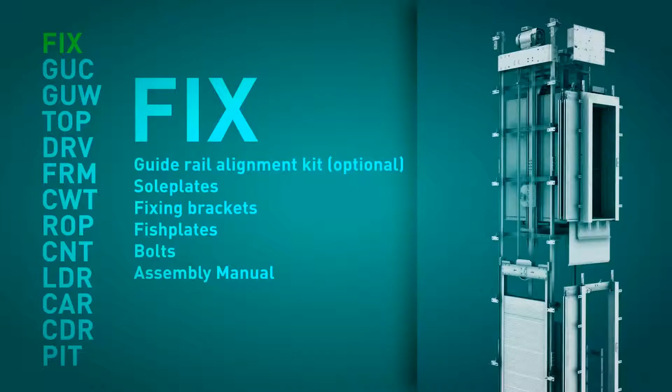Wittur considers the installation of an elevator as a sequential assembling process of elevator subcomponents. It is for this reason that the parts of Wittur's elevators are carefully sorted and supplied in modules. By module, we mean the group of components which, once assembled, carry out a specific function within the complete elevator.

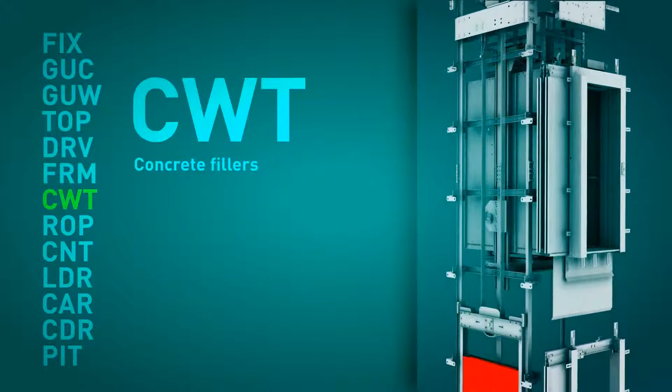Each module can be made up of one or more packages. These packages are identified with a description of the module and its position within the assembly sequence. The supply of the elevator has been designed to fit what we consider to be the logical assembly sequence of a machine roomless elevator.

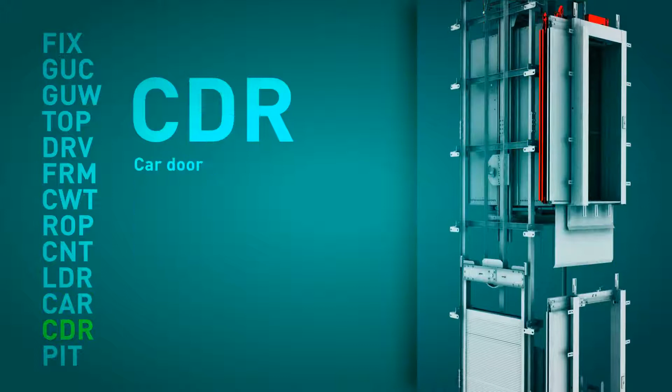The package that we have to open first is labelled and easily identifiable. Attached to this package, in a protective plastic cover, is the packing list and a document which details and lists the material supplied in each of the various modules. In this first package, we can find the assembly manual of the elevator and all the assembly handbooks of the individual components. Before starting the assembly process, we strongly recommend the assembly technicians read all the manuals in detail.

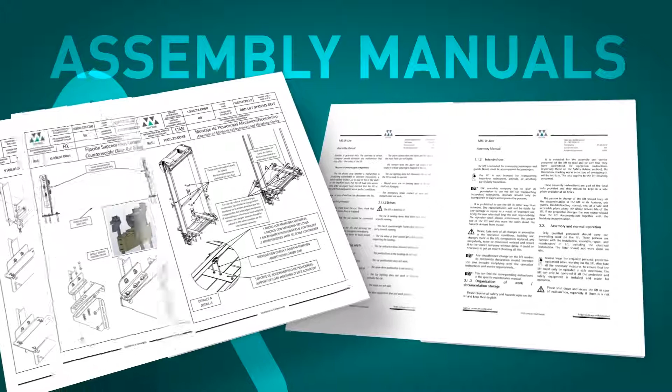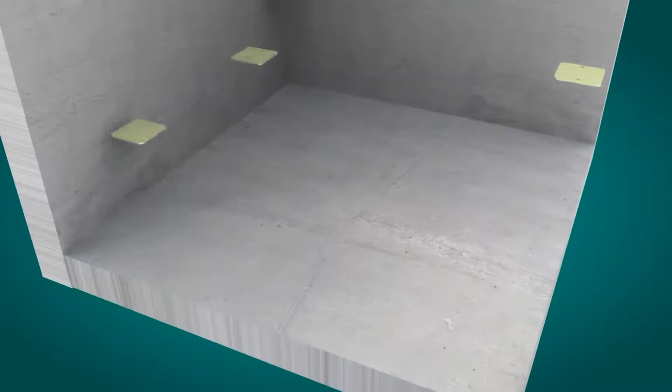The assembly of the MRL W line starts by checking that the conditions of the shaft, dimensions, cleanliness are satisfactory and that all the necessary material and auxiliary tools are available on site. The guide rail sole plate must be correctly positioned and levelled according to the assembly manual.

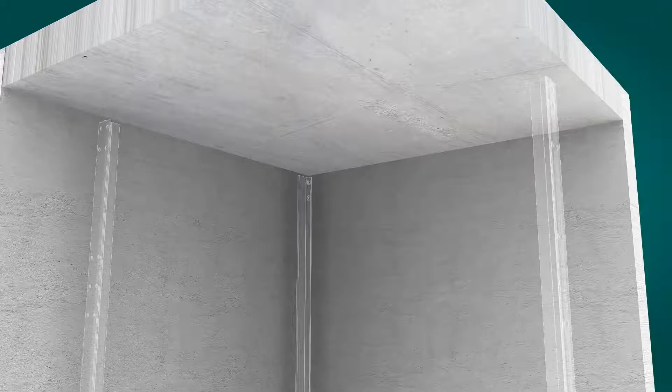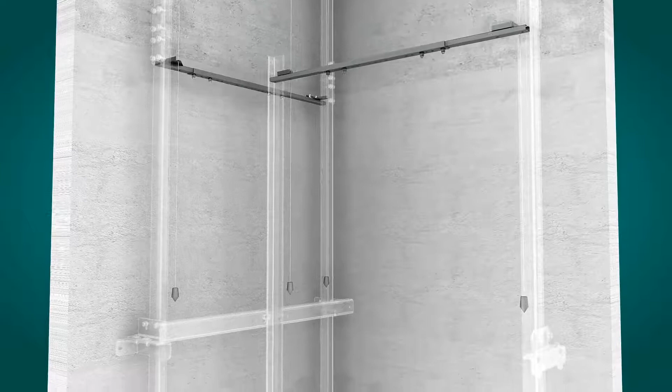The bottom portions of the car and counterweight guide rails are cut and assembled according to the installation drawings. Should there be a difference between the pit depth given in the installation drawings and the as-built depth, the bottom guide rail can be adjusted and cut to the right length. A tool to help align the guide rails is recommended in order to guarantee a correct assembly. Wittur can supply a guide rail alignment kit upon request.

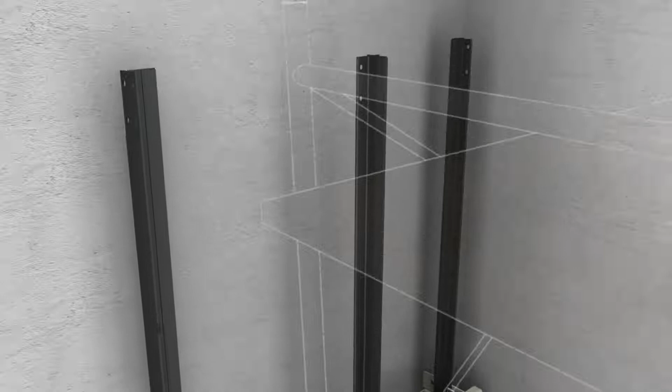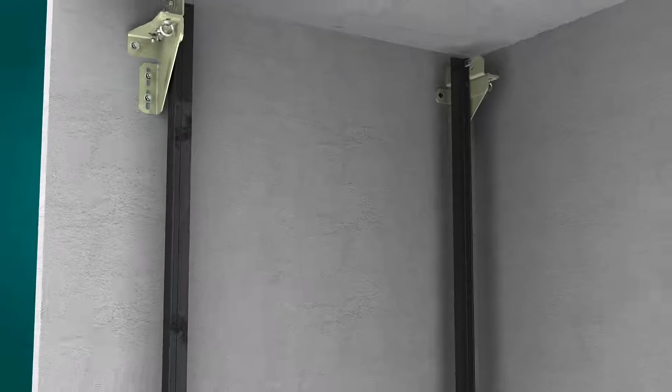The first row of guide rail supports is assembled. Their position is detailed in the installation manual. With the help of some scaffold platforms, the successive guide rail portions, 2.5 meters or 5 meters, are assembled with their corresponding support brackets. Once the last section of the counterweight guide rail has been assembled, the topmost bracket can be fixed into place. The last portion of the car guide rail fixed to the bed plate is assembled once the machine support has been installed.

Alternatively, the process of assembling the guide rails can be carried out from a temporary platform which is fixed to the guide rails that have already been mounted and lifted up through the shaft by means of a block and tackle.

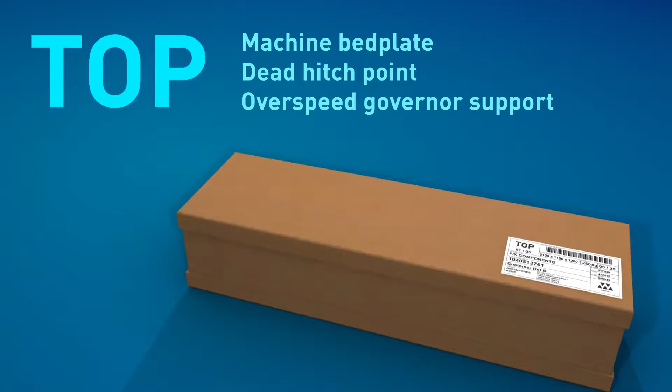The machine bed plate is assembled next. A comfort kit is standard supply for 1.6 meters per second, but optional, though highly recommended, for 1 meter per second. These low-frequency metallic cushions absorb any vibrations that the system may produce.

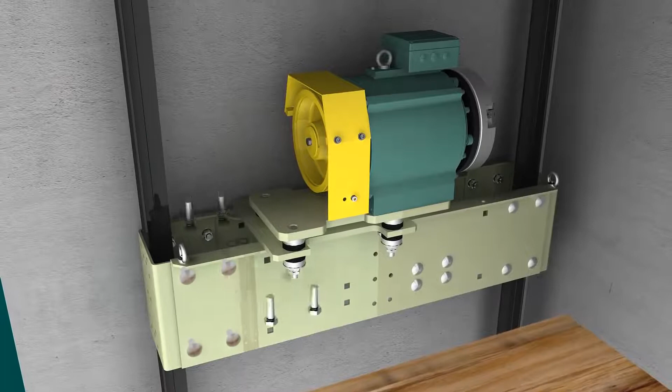The machine is fixed to its support and is lifted and guided into position with the help of a block and tackle. It is fixed to the sheave side with the fixings provided, and once the machine is level, these fixings and the clamp can be tightened. Once the machine is in place, the penultimate guide rail support and the last section of car guide rail fixed to the bed plate can be assembled.

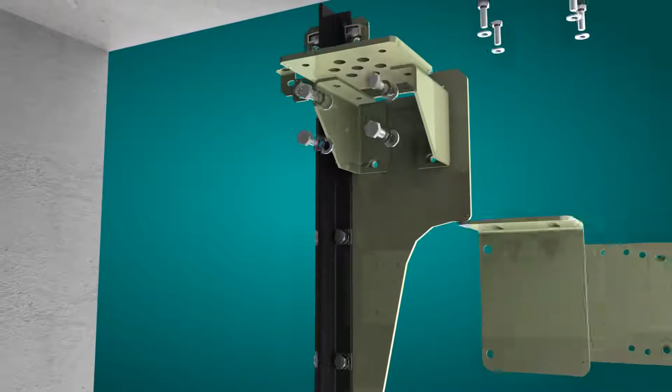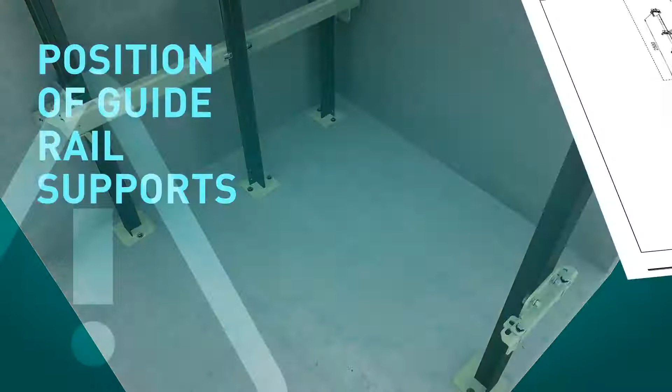The dead hitch point can now be assembled, followed by the overspeed governor and the slack cable control device, should it be applicable. At this point, all the mechanical elements of the elevator are assembled in the headroom. All the guide rail supports must be placed in the positions detailed in the installation drawings. The position of the top and bottom brackets is of special importance. Any scaffolding and platforms should be removed at this point.

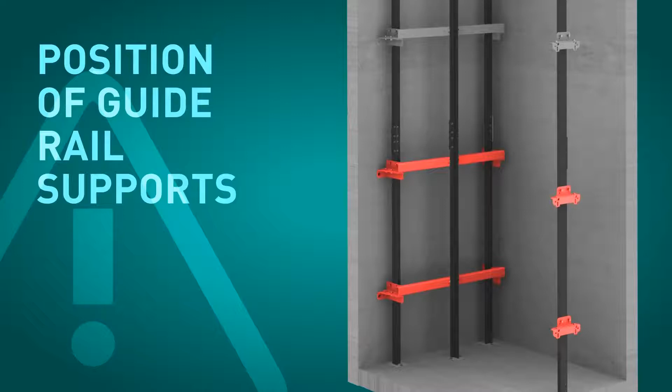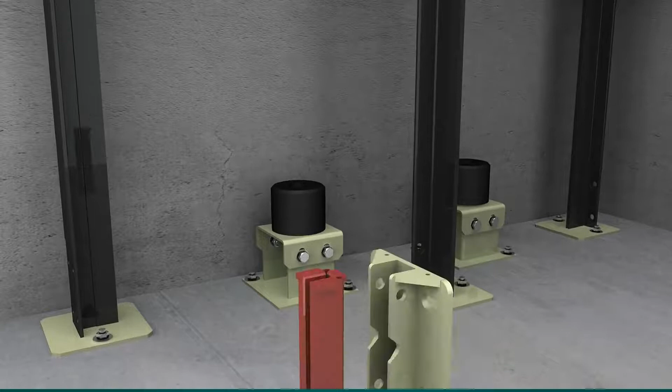It is now time to go into the pit. In the module FRM, we will find all the components relating to the car and counterweight frames and the buffers. The counterweight buffers should be assembled first of all in the position detailed in the installation drawings. Resting on its buffers, the counterweight frame is then assembled.

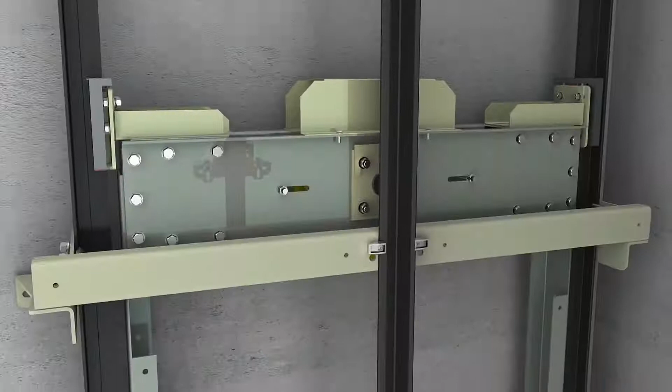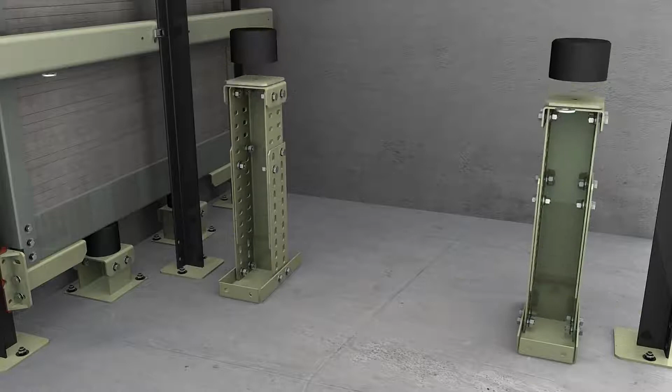A partial loading of the counterweight should then be carried out, according to the individual assembly requirements of each elevator. The car buffers are assembled next, in the position detailed in the installation drawings. Resting on its buffers and on the car floor, the car frame is assembled. As an optional accessory, Wittur offers a temporary protection to protect the car floor whilst the assembly process is taking

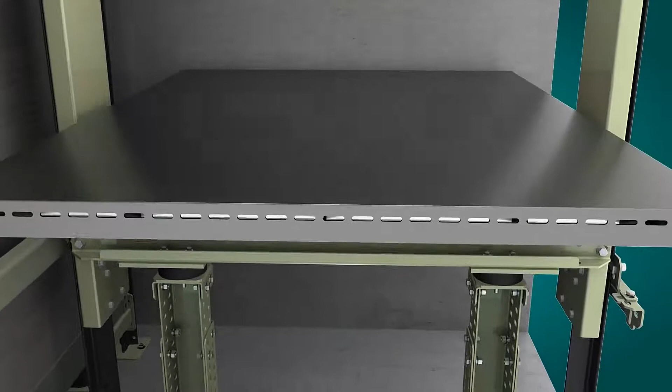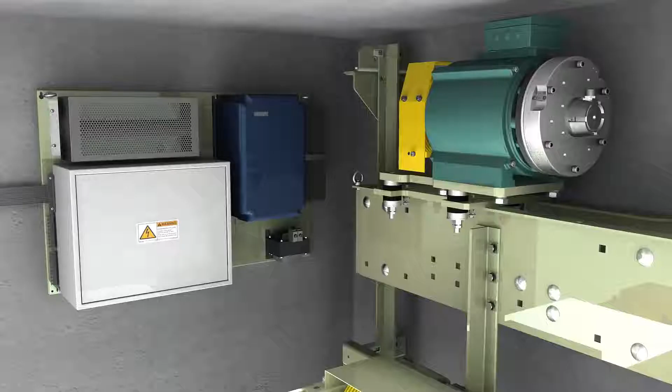place. The slings are now correctly assembled and positioned within the shaft and between the guide rails, and it is time to suspend the car slings in order to assemble the traction ropes. All the necessary material is supplied in the module ROP. The machine should previously have been connected to the power with the encoder cable.

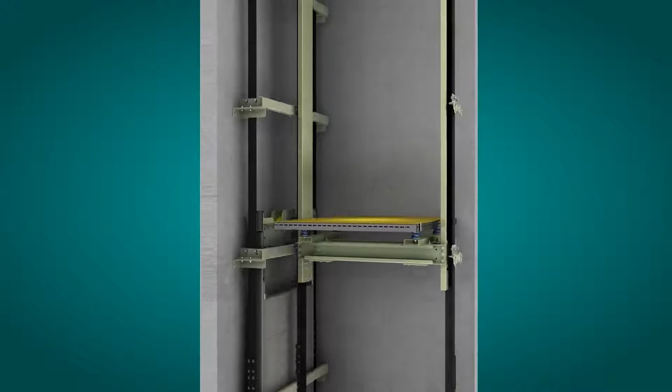The car sling is then lifted with a block and tackle to the highest floor that allows the floor of the car to lie flush with the landing FFL. Its position is maintained by means of the car frame locking kit. This element has not been designed to specifically suspend the car, but to fulfill the function indicated in clause 6.4.3.1 of the standard EN 81-A3.

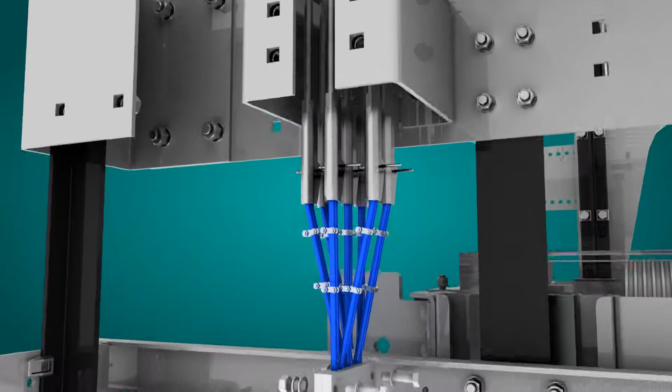For the assembling of the traction ropes, please follow the instructions detailed in the elevator's installation manual. Repeat the process as many times as needed. A rope clasp guarantees the correct alignment of the ropes as they are fed into the grooves of the sheave.

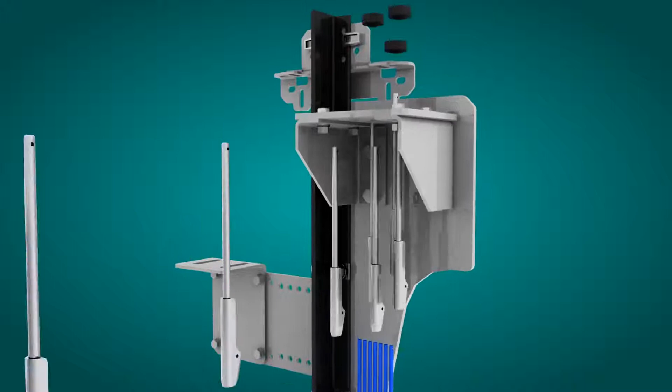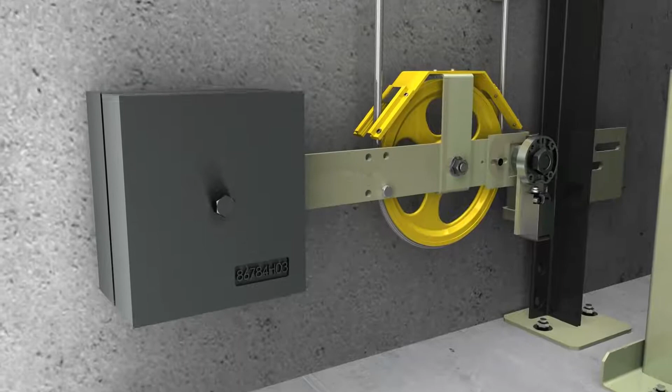The next step is the assembly of the overspeed governor, its tension weight and the cable that joins them. The fixing of the overspeed governor cable to the frame is the last stage of this sub-assembly. At this stage, the elevator can be used as an elevating platform with the use of an assembly operating panel. The elevator must be handled with great care during these journeys. With the help of the elevating platform, the landing doors are assembled.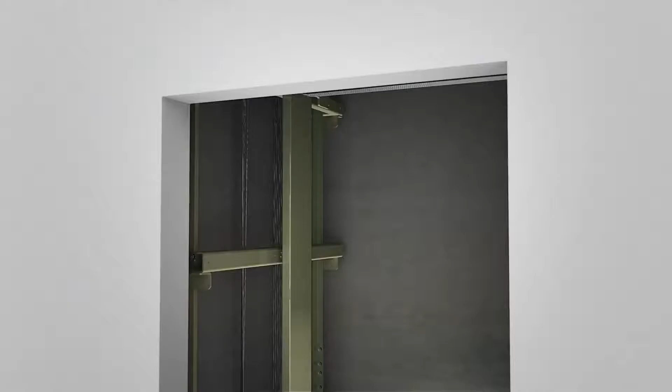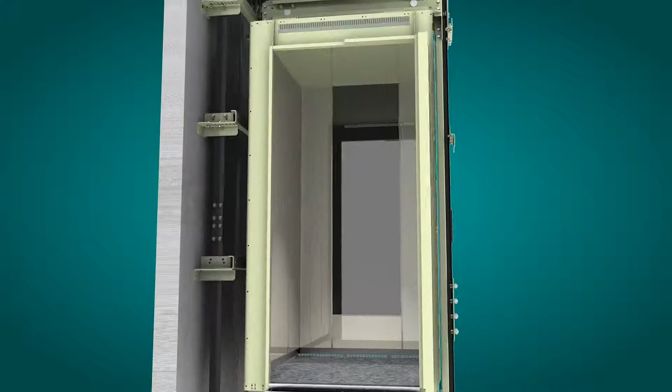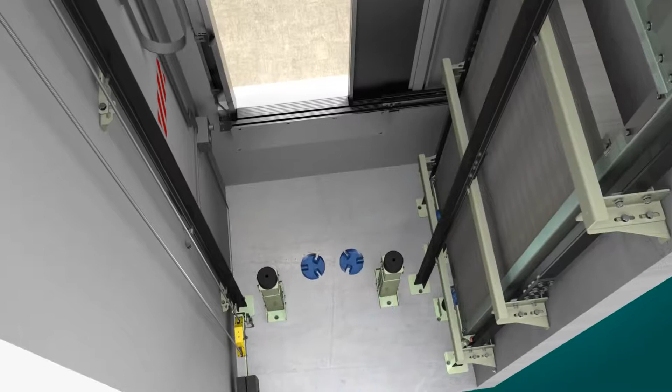Before starting the assembly of the car, it is essential to mechanically block the car frame and to remove the floor protection should it have been used. It is now time to assemble the car door. The pit components can now be put into place. The counterweight screen is fixed to the guide rails, and should it be applicable, the pit ladder is fixed inside the pit. From this point onwards, the electrical elements can be assembled.

The MRL W-line controller, with its plug-and-play concept, is probably one of the market's most easy and intuitive controllers to install. It is delivered perfectly packed and identified in 4 packages: power and control, pre-assembled electrical installation of the shaft, electrical elements of the car, and the controller cabinet. In each of these packages there are various assembly kits, each one accompanied by a description of its contents and an assembly manual, numbered according to the assembly sequence.

The controller cabinet, with its reduced dimensions, is placed neatly in front of the frame of the landing door located on the last floor. The simplicity of the controller does not reflect its features. The MRL W-line controller can be supplied also according to other standards, such as EN 81-70 and EN 81-73. Upon request, it can also be adapted to the EN 81-71 and EN 81-72.

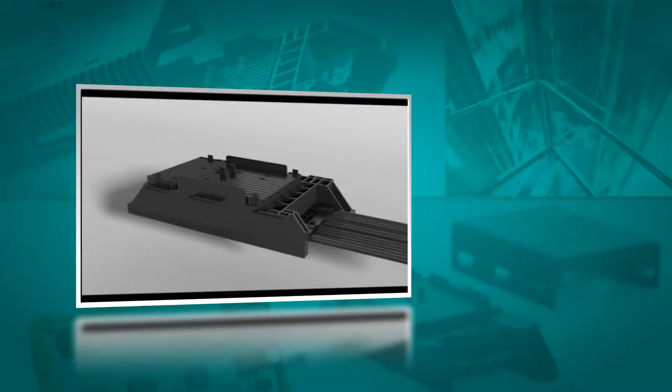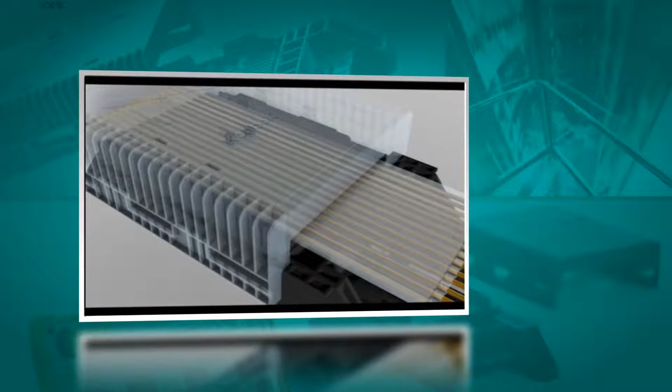Our pre-assembled electrical installation uses the CON-box system, which greatly reduces the assembly time, guarantees the quality of the CAN bus signals, and sets us apart from our competitors. The flat cable is manufactured with highly resistant and durable materials, which guarantee an optimal protection of the low-frequency CAN bus signals. An absolute positioning system of the car by means of a 4096 pulse encoder is optional. This makes assembly easier and guarantees millimetric precision of each stop.

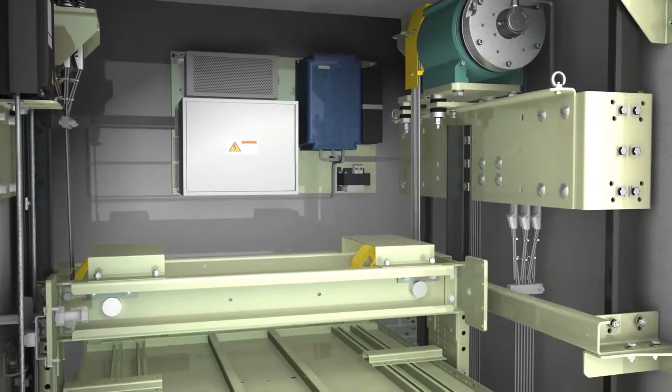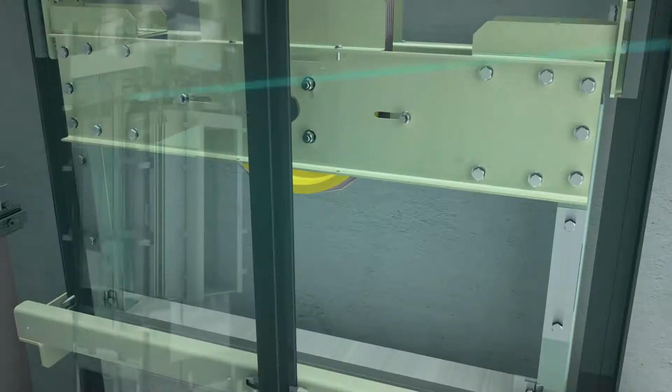The penultimate task is the important one of cleaning the shaft and the pit, and of oiling the guide rails. Finally, before the lift can be put into service, the MRL W-line must be submitted to a series of tests, according to Annex D of the EN 81-A3, in order to ensure the perfect functionality and safety of the lift. Wittur supplies a specific document which guides the assembly technician through all the steps that must be carried out.

Wittur has been issued by AENOR a conformity certificate, confirming the implementation and maintenance of a quality assurance system for the design, manufacturing and final testing of elevators, and certifying that it complies with the requirements of Annex 13 of the Lift Directive 95/16/EC. This means that any assembly company with a quality assurance system compliant with the Annexes 12 Module E or 14 Module D of the Lift Directive 95/16/EC can put the lift into service and certify it accordingly.

Wittur can also supply the necessary documentation, allowing any assembly company without a quality assurance certificate the possibility of certifying the elevator through an external notified body according to Annex 6.